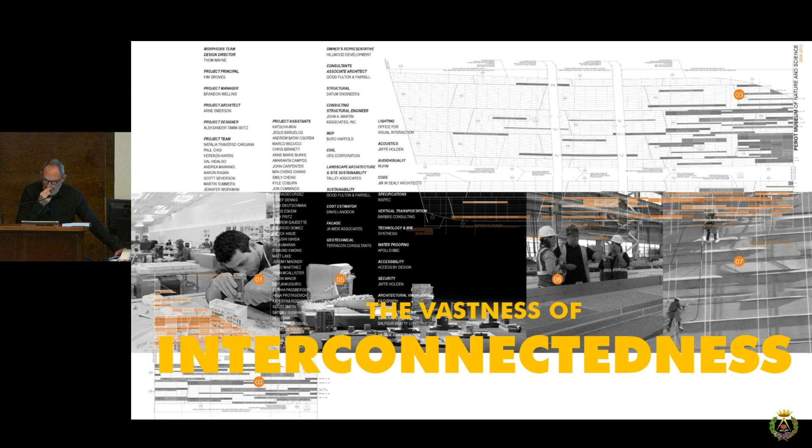You start your thinking out of school, and it's somewhat private, and you're looking for a voice and a signature, and it's somewhat mysterious, taking place somewhat intuitively, the way if you were a musician or a painter in any different art form, you're locating your own instinctual stuff that's separate from the more discursive stuff that comes out of your university training, etc. And if anything, you're challenging or reworking that, because the university is broader.

Yeah, that's better. I like when you go black. It's always weird to be talking to blackness.

You're locating yourself in formal terms, and there's definitely things that are going to show up later in your life that you're not aware of. In this case, notions of disconnectedness and fragmentation, which were much more part of my personal life, had to do with my own condition as a young man. You're exploring something, and you're not even quite clear on the nature of that exploration. It's quite intuitive. But what you are clear of is that you were influenced by certain people.

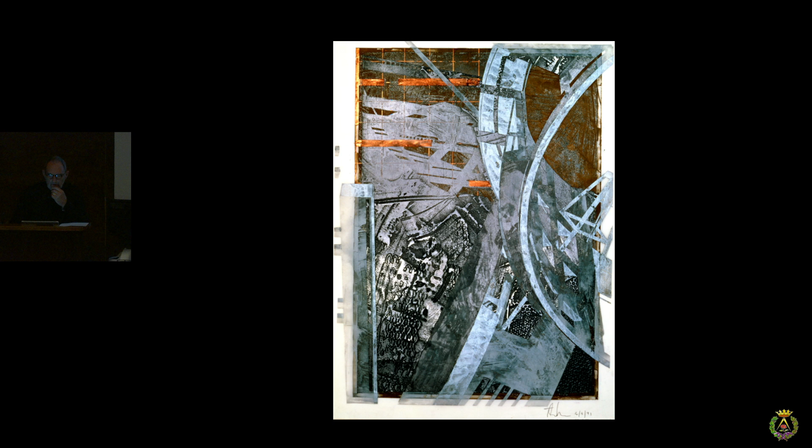Then there's other kind of simpler things. I'm in my late 20s, and there's no work. I'm teaching, and doing a little bit of stuff to make a living, and this is my output - this is the work I'm doing. In the 70s and early 80s, there was actually a different environment in the US than there is now, and I was being shown in galleries, and I could actually use this. It was accepted that as an architect, you could work conceptually. And the output is that.

Again, I'm looking at multiple mediums, and the work is progressing, the idea is progressing, and it's going to continue working with formal ideas which have to do with new notions of coherency. I'm fascinated in the way architects, in the simplest way, we order things. We concretize the world. We take idea structures, notions that are social, cultural, political, etc., and we concretize them into form, right? And we use inert matter, basically mineral material. With that, I was interested in the vibrancy, the aliveness, the awakeness of that material.

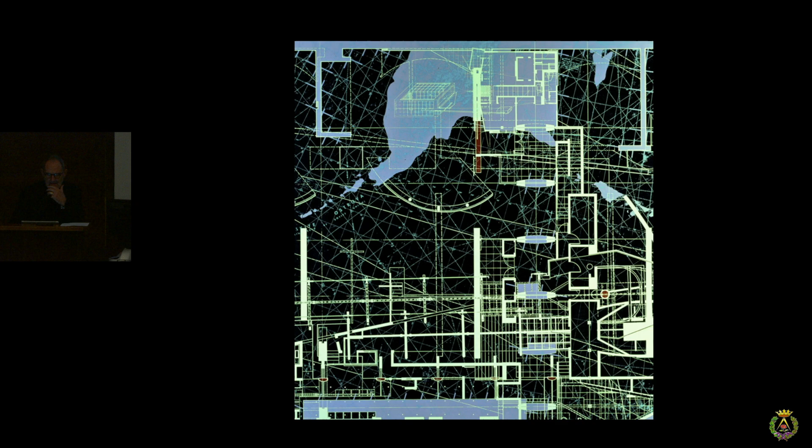And communicating that - I'm of a generation that broke from the modern tradition. In the 60s, late 60s, when I was in school, there was a complete openness to what education was, what architecture was, and I left with questions versus solutions, right? And then the influences were vast, and they weren't coherent, or they weren't connected.

So Rossi and Stirling and Archigram, and I could rattle on, the Tendenza - all of them were just seeping in, and there was no connectivity. It was up to you to figure out the nature of these kinds of issues. And they were very, very fundamental, the most essential notions of what architecture is, having to do with even its stasis, its permanence, et cetera.

And of course, with that came the obvious influences of that period of time, which started with political resistance and an explosion in the arts, because I was inundated in film - it was Truffaut and Godard, and it was that era of experimentation. And of course, in the world of music and culture taking place at that period of time, without any question, had influences, maybe even more so than the architectural.

And the drawings continued, and then it started in the late 80s - the computer shows up, and I'm drawing, but I'm trying to draw like I draw, and I'm kind of challenging the rules of the highly systematized notion of the digital, which will be later the conversation. It's going to quite radically change how we think about architecture, but it's going to take a decade to figure that out.

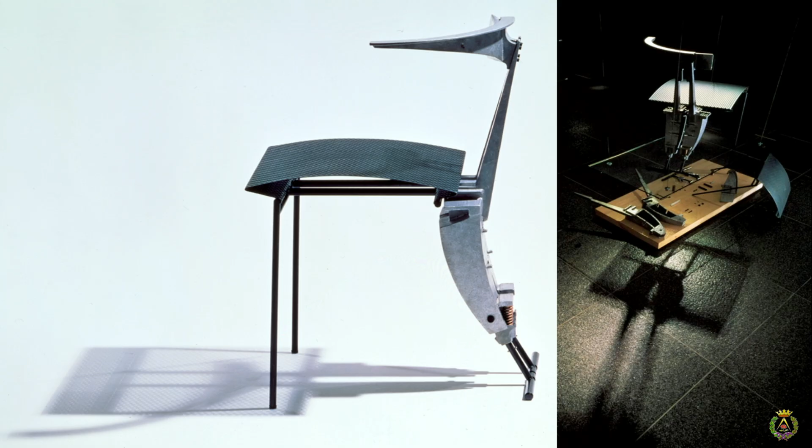But what I really was fascinated with was the mechanics, and that quickly became part of our early work, and then with the conceptual stuff that came out through the drawings and the models, we're making things. We're very much involved, and it started with very small scale things and objects. We're investing time in various material processes, and understanding that the capability of creativity comes out of that process very differently than the conceptual or intellectual process. It became clear at this time that there was a connection between these two things. They both kind of operated together.

Out of that came an interest in intensifications of the work, because then the first work shows up and it's normative, residential and little cafes, and had no interest whatsoever in program, had no interest in the relationship of those things.

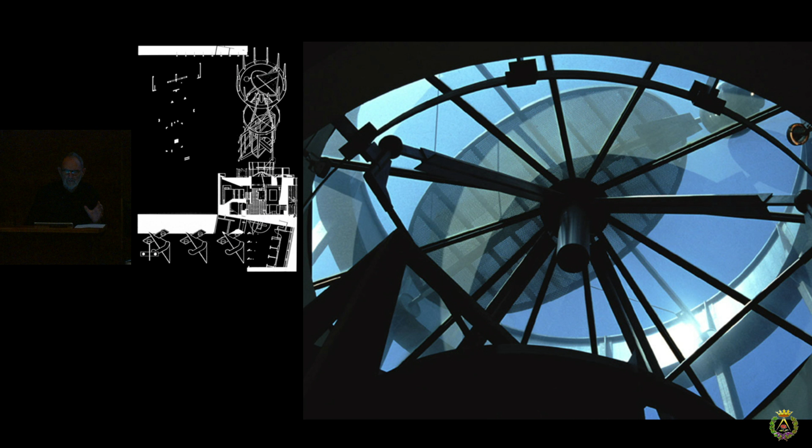We're interested in locating architecture. And how does one claim an autonomy for architecture? In this time, we were totally committed to architecture as an autonomous act, and we wore it as a badge outside of normative behavior. Couldn't do that today - that's not a model that you guys can use. It could happen in the 70s and 80s.

But this led to kind of intensifications of projects. We're working on a cancer center, and this one piece became part of a children's play area. It became a fascination where we could use the interests we had at the time and manifest those in the project. This became kind of continuous.

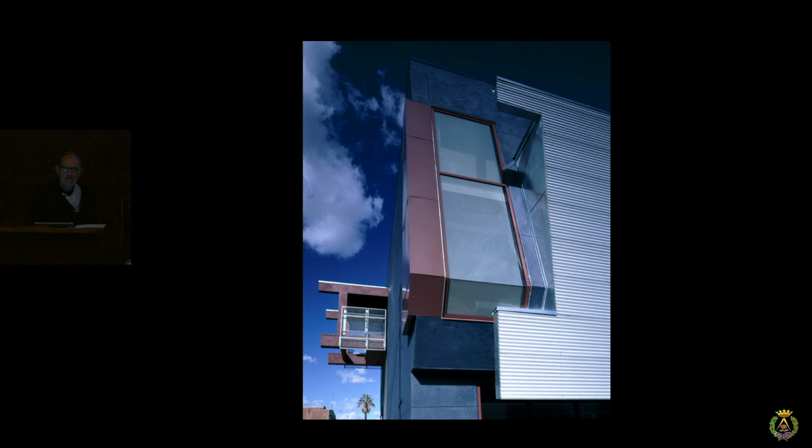And it's going to start leading us into something else, and at this time, without knowing it, we're starting to shift a notion of part-whole in the most basic way, Palladio. The relationship between part, fragment, connection, disconnection, the way one organizes an idea having to do with certain hierarchies, repetition, etc., were being challenged, but the focus was still more on the degree of intensification within the work.

And then this little house became kind of a beginning model that was going to move us more into an urbanistic direction. We're making things, and it's starting to become clear that we can organize these different systems.

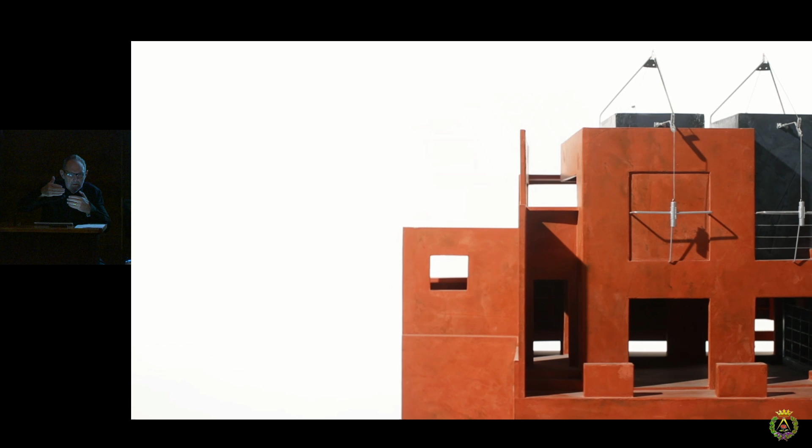And I became more and more fascinated by an idea that Smithson was an initiator of in the mid-40s, having to do with multiple systems and the autonomy of multiple systems making up something. So the thing you're making isn't made out of a single system, it's made out of multiple systems, and it's getting clearer as we're producing these first little residential projects.

And it's starting to lead us into another idea organizationally, that there isn't a single dominant system. There's a series of interconnected things taking place, and it's more and more about interconnection.

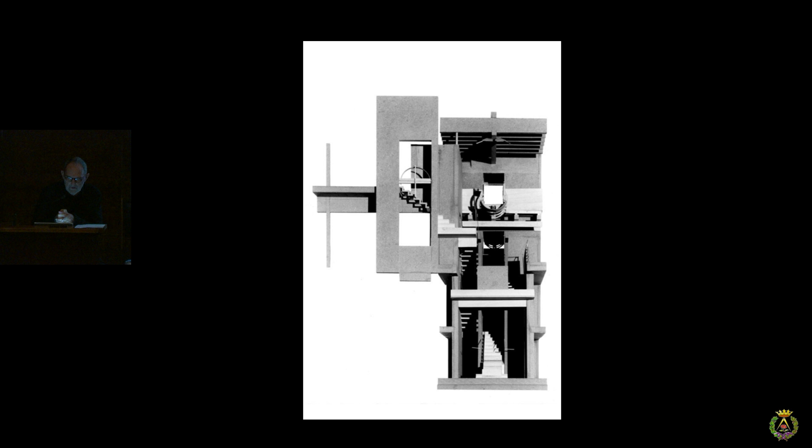And then with that, certain things happen that are absolutely accidental and circumstantial. A fragment of the model of the project in front of us - we're building one of these areas we're focusing on, and then as we look at the photograph, we realize that the fragment is more interesting than the total. We're just looking at something going, how is it possible to build something that's completely unfinished, that it now alludes only to the future, the thing in front of it.

It's actually quite a hard thing to construct, at least it is for me mentally, but it requires operational strategies that you understand is the method of working that achieves that. And at this time now...

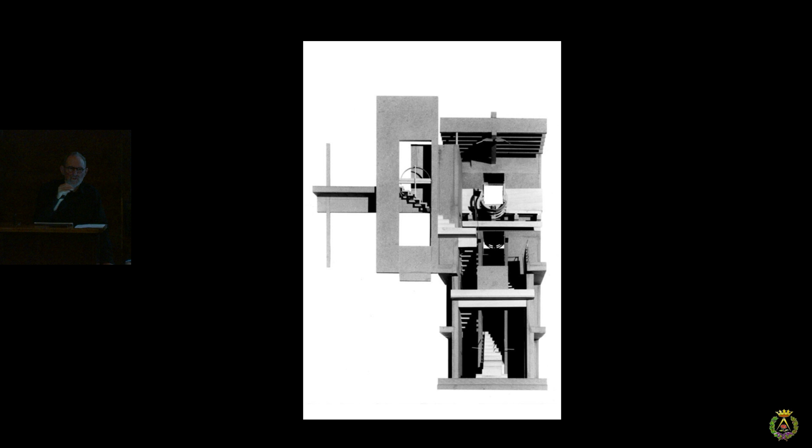the people that I'm connected to or influenced by would be Bernard Tschumi and Peter Eisenman, and people that are using operational methodologies. I'm getting more and more interested, especially in my academic work, in challenging a priori design thinking, drawing, which uses the past, uses precedent, and using operational strategies that take you someplace that you have no notion of where it's going. It's challenging anything a priori.

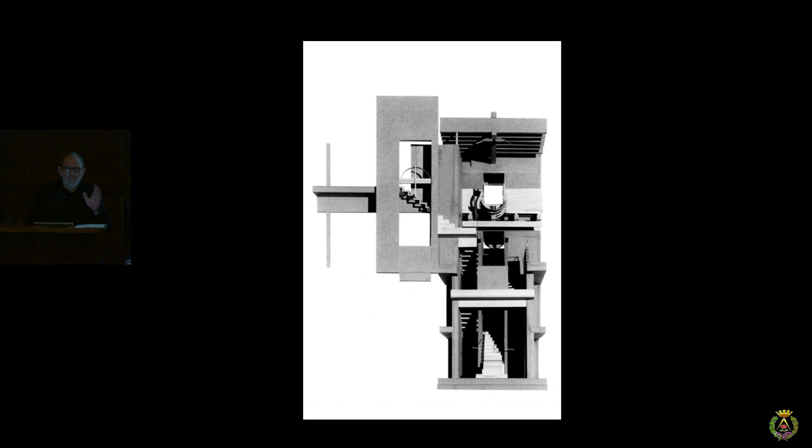And it became kind of a fixation in that the only things I was interested in were the things that I didn't know where they were going. And it became, at that point, an absolute kind of continuum.

And then immediately after that, the development of the 6th Street House, where we're now organizing something through an association of a series of elements - in this case, 10 pieces of discarded technology, of dead tech. And at the same time, breaking this notion of singularity where every elevation is now a response to its urban condition. It's an experiment with rethinking the nature of, again, coherency.

And then in the resolve of this residence in Santa Barbara, a development of now a language that's made up of these various systems, all left unfinished, all fragments of some total thing. And you're looking at something that more and more is made up of relationships. At this point, it's getting clearer and clearer that we're not any longer interested in the object, we're interested in the relationship of objects. And the focus is getting clearer and clearer.

And then with that, we're now starting to get more and more involved with the relationship of site and earth, and we're digging. And again, I'm absorbing an incredible show at Leo Castelli, can't remember when, and I became aware of Pichler. And then right after that, I met Raimund Abraham, and I got interested in digging, and the whole notion of ground became kind of a fixation, and it became an expanded kind of interest.

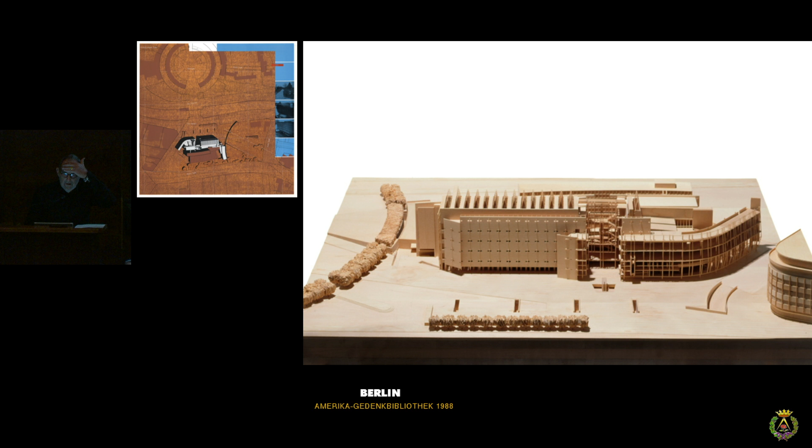And then we're working on competitions, and we got invited for the Amerika-Gedenkbibliothek in Berlin, and this notion of highly specific architecture that's coming from multiple systems that makes up a combinatory language—although I didn't use those terms at that time—is becoming absolutely part of an urban strategy, and probably is much more relevant urbanistically than it is architecturally, you might argue.

And so we have something here where we can identify historic elements and use those as grounding elements, and we can invent certain things, and it's going to be a combination of conserving and expanding found urban elements and provoking those. And then with that, I guess, a clarity of not taking any singular position of being conservative or provoking—that those things happen simultaneously.

We didn't discuss that in the urban work, but it absolutely could have been a conversation today—that as you look at the site, aspects of that are in fact reinforcing or dealing directly with found information, and other things are absolutely provoking that. And they can operate on a scale. If we looked at various projects, some of them could have much more been in the provocation area, and other ones could have been much more in the conservation kind of territory.

And again, the competitions are now practice runs for future work. I'm in my late 30s, and we're doing smaller scale work. And this—we won a competition for a theater that didn't get built.

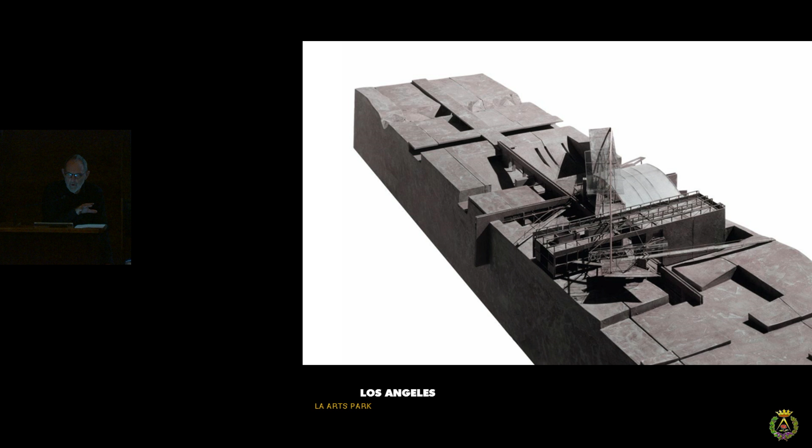And now any number of things are taking place between organizational ideas and the ground, and the site is becoming more and more prominent as the relationship, the site, takes place.

Infrastructure, theater complexes, commercial complexes, we go on. And it would have been really interesting, again, if we had continued the conversation with you guys today in the urban—it would definitely have been the next stage of the conversation maybe. We would have discussed looking at really, really different kinds of potentialities of the integration between landscape and site and building.

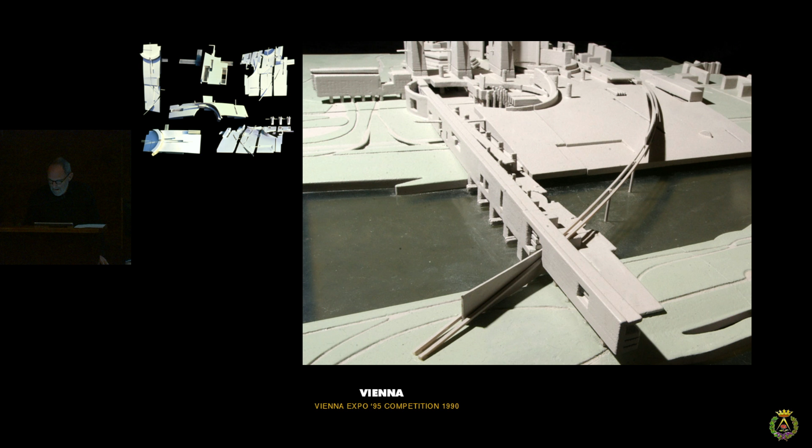Because as I said today, one of the opportunities in front of us is something that's much more hybridized. Because in this project, half of the program would be ground related and half within a more traditional typological approach. And we're now discussing typology and morphology—there's a kind of conversation taking place.

And then in our project in Chiba, this is starting to take place as we're trying to find an architecture which is very much about site and starts with the notion of site and landscape. And this could be a dialogue between landscape and building.

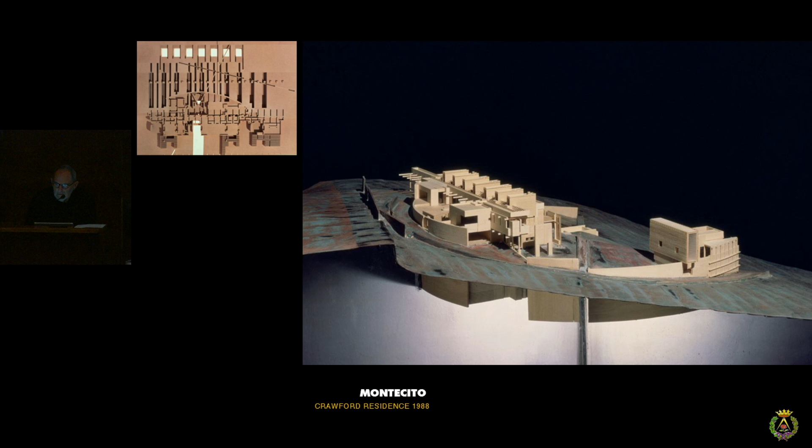And then right after that—what have I got here? Ooh, we shouldn't have shown up. We're doing a house, and a lot of these same ideas are taking place.

We're starting work now, and again I've put this together for you. I'm working a couple of decades and a half in, and we're getting our first substantial work. I'm 47 or 48 years old, and it's a school, and we had kind of an unusual client that allowed us to explore.

The work now is clearly shifting from an interest in autonomy being challenged, and the fixation on conceptual, formal work is now getting challenged to some degree. We're involved in architecture as a social act, participating in the educational act, and we want to expand a student's curiosity about the various potentials of how architecture can service them.

And then with that is the beginning of the digital world. The little piece at the top is the first conceptual sketch, and it's again going to be an augmented landscape. Out of that is going to come this.

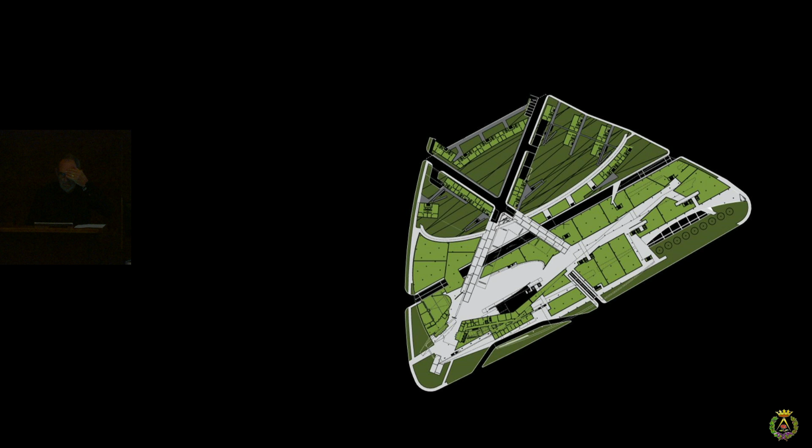Right after that, we won a competition in Austria for the Hypo Bank. We're in this middle territory now between the older processes of drawing in a manual sense and the digital world. It's becoming clear with these drawings that drawing is now highly limited, and that the thinking process takes place with complex relational material that the digital world allows us to do.

And it operates three-dimensionally. At this point we're probably realizing that the planimetric is pretty much over as a primary process of developing architecture, that we're now moving into something three-dimensional.

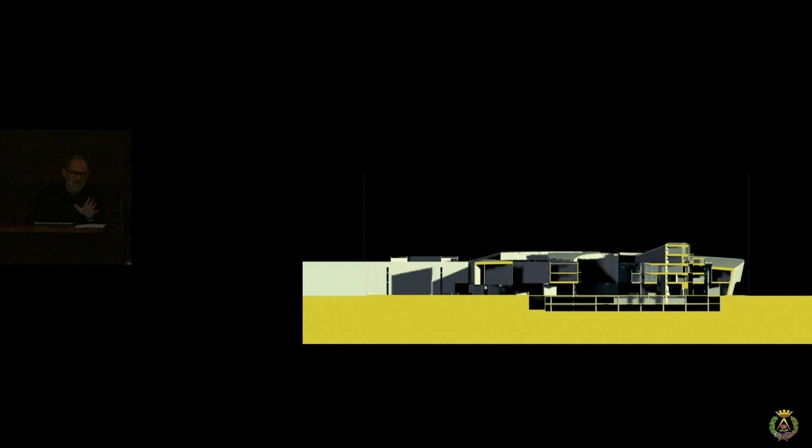As we're looking at sections, huge numbers of drawings that are now mechanical, but what's taking place is there are less and less sections in the conventional sense. They're CAT scans, a way of observing a project and understanding it organizationally within certain terms. And out of it came this.

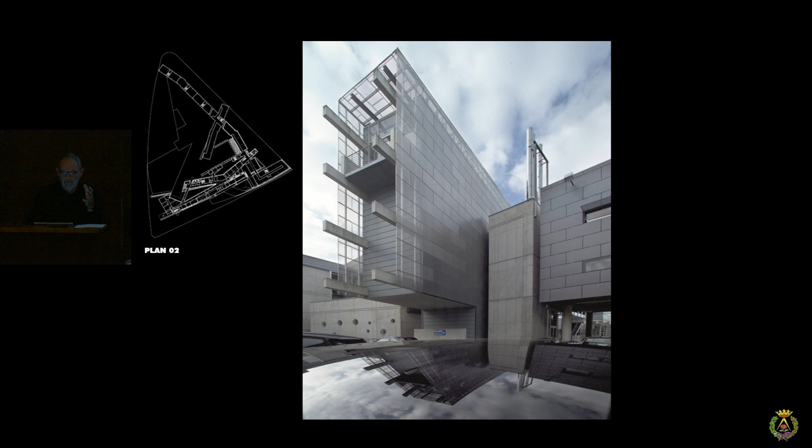Then right after that, for the same client in Udine, a project dealing with landscape, building, and infrastructure has a more singular idea.

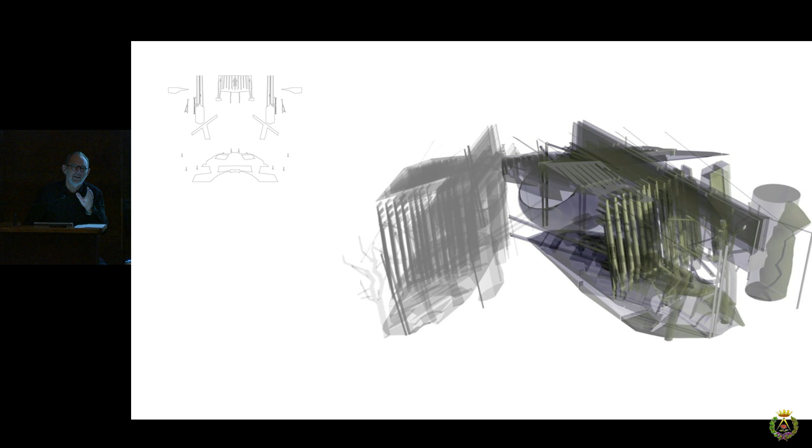Then the digital is having a huge effect on us in that we're producing things three-dimensionally that have different notions of association and arguments, and they're dynamic. The section you're looking at, again, is a CAT scan — I'm cutting 100 sections through this and observing the nature of the product we're developing.

Then what happened, which was enormous, is that you could crawl into your drawing, or whatever you want to call this virtual space, and you could connect concept and perception. That became enormous — we can actually experience the conceptual ideas, the broader intellectual thinking, spatially.

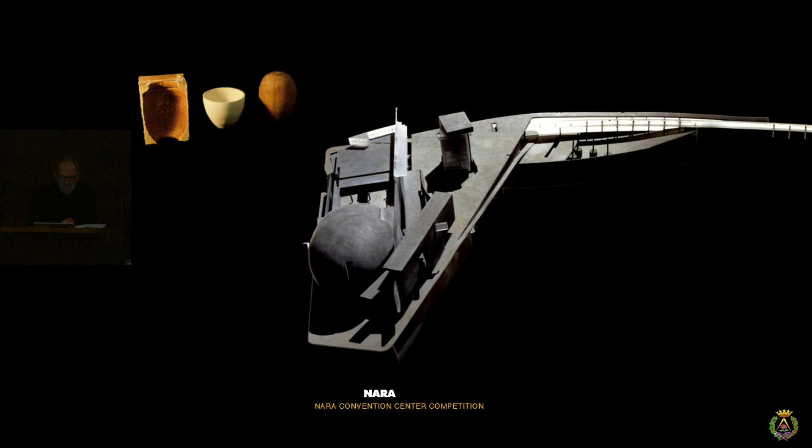Then there's a competition for Nara that we lost to Isozaki, where we're producing forms we can't even produce mechanically. Four years later, we're working on a competition where we can now, in minutes, operate within complex geometries. And what's taking place now, which all of you entered into, is interesting today.

It seems like there's a very different kind of direction here architecturally than there is in the US. The work I saw was still Cartesian and orthogonal, et cetera.

For me, this just opened up possibilities. I have no particular — it's not about a value judgment. It's just there. I don't have to agree or disagree with it. It's just now how I can work.

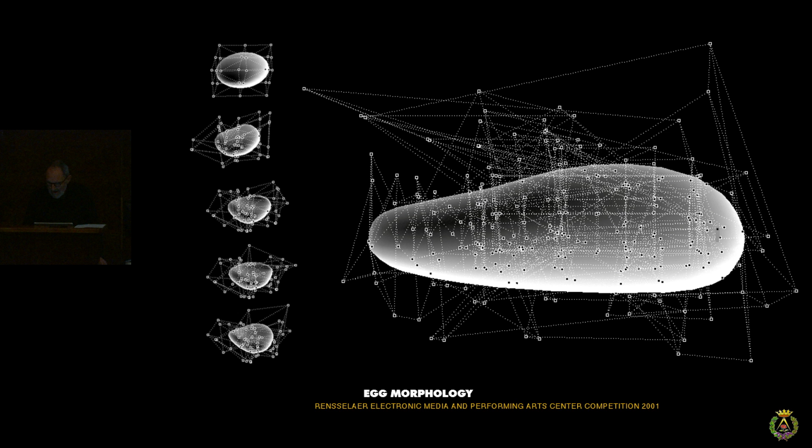I can now operate and move very quickly. I can look at it sectionally in a traditional way, I can look at it as a model, put it on a site, and model it — all taking place through the digital world between 8 at night and 8 in the morning.

I'm also moving at the speed of light. What you're going to face is larger and larger scale projects with less and less time. One of the things that will be absolutely essential to architects today is dealing with the speed at which the world operates in a commercial sense, because you're dealing with larger scale projects with the least resources.

The first stuff I showed you, I spent a year on a residence — and now we're spending that same amount of time on projects that are in the million square feet range. There's no choice.

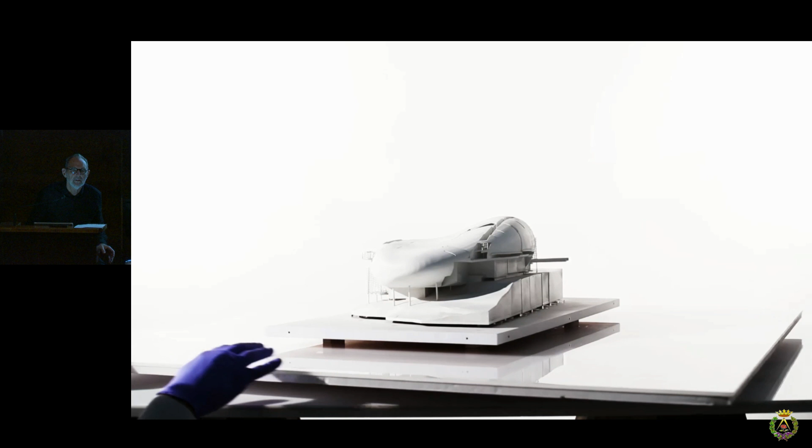It's the nature of the marketplace, right? And there's a huge shift going on now. We can look at our work in incredibly comprehensive terms, what's taking place in the digital world is affecting your work right now—that early schematic, pre-schematic work is loaded with information.

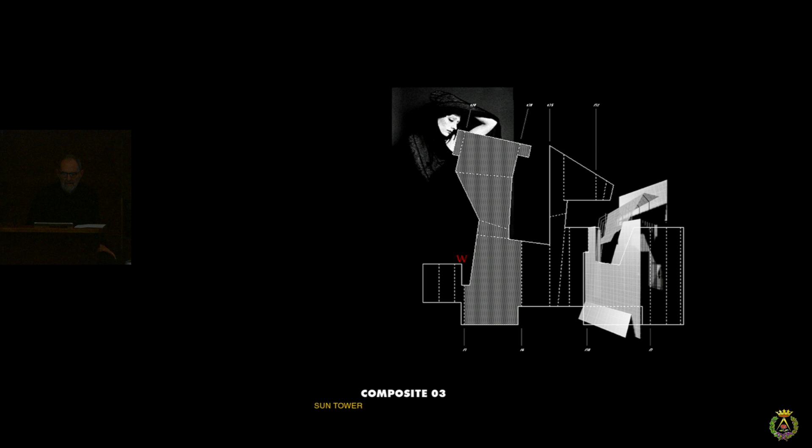You can discuss it in tectonic terms, structurally, mechanically, functionally. As projects get more complex, you're looking at a model for a competition that REM won in Taiwan—that's 8 weeks, and it's the necessity of how we work today. Then we're in Korea dealing with skins, which becomes another preoccupation. We're using Jim Dine and a piece of clothing, one of the last projects I'll show you. We're capable now of looking at things very quickly, organizing them in very complex terms.

The work begins now, you might say—that's the preliminary work, establishing a lot of the terms I'm interested in. We're going to start in Los Angeles with our first large-scale project, which has very much to do with the public, and the iconography of Los Angeles as the city of film. It continues our interest in the eccentric—I'm searching for elements of design that come out of chance and circumstance, idiosyncratic versus systematic.

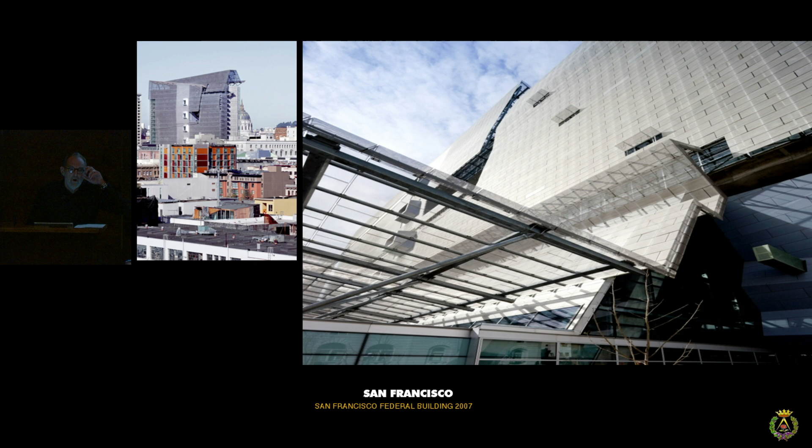Then in San Francisco, we're taking the performative aspects—the skin you just saw is moving, producing a highly efficient building. What's happening now is we're moving further away from a preoccupation with the formal and getting more involved in performance and the demands of buildings as they increase in scale. This is the headquarters for the federal government, the first tall building with no air conditioning in the United States—it's performance driven.

Again, it's based on a main public space, and we were very connected to the formation of the program. It's getting clear that the work becomes more strategic—when one takes responsibility and pushes the program in the direction of the project prior to formalizing or concretizing it within form. In this case, it has to do with a substantial shift in the workforce, now based on transparency, interconnection and dialogue, challenged by the digital world again, where any place equals workspace.

There's a complete challenge of the singularity of work versus leisure versus recreation. The architecture, this notion of the combinatory, these multiple systems, isn't even part of the conversation—it's the private conversation within the studio, nothing to do with the client. The focus is on multiple levels of performance. One major idea was the icon of the entry space and its importance in representing the U.S. government. Then the performance became hugely important to the building in terms of environment.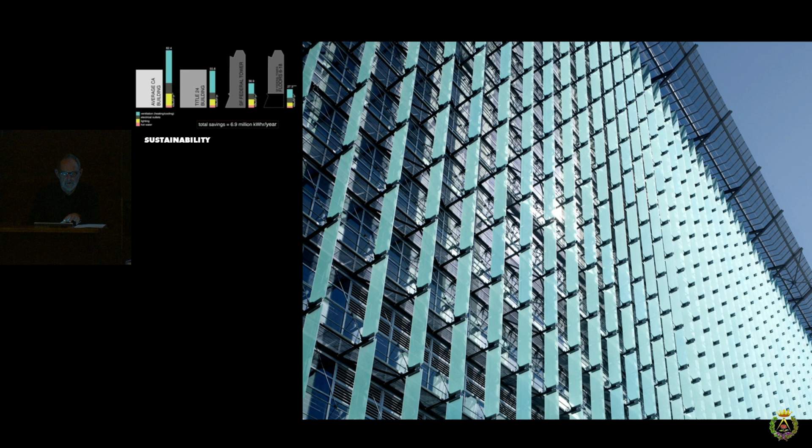The north face is guiding in sun, and we can now talk about this in terms of its relationship to total energy. We can discuss with our client that one of these buildings totally powers 600 houses. I would have said in today's jury—which we didn't get to—one of the conversations would have been looking at your work in terms of its broader consequences, being responsible for those consequences as their magnitude increases and as they have more importance to city making.

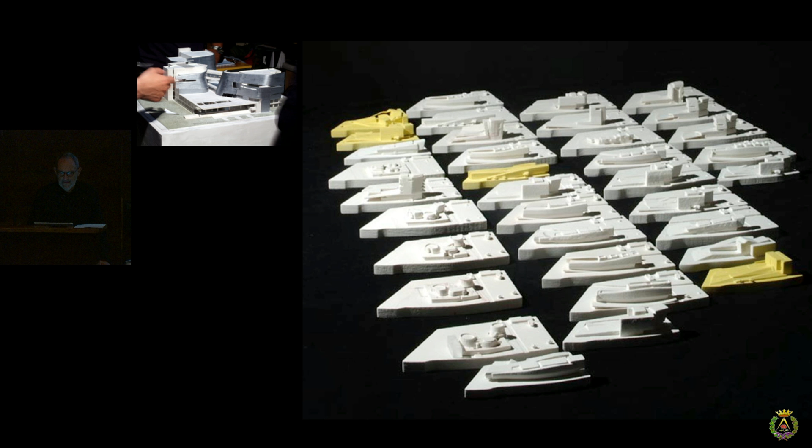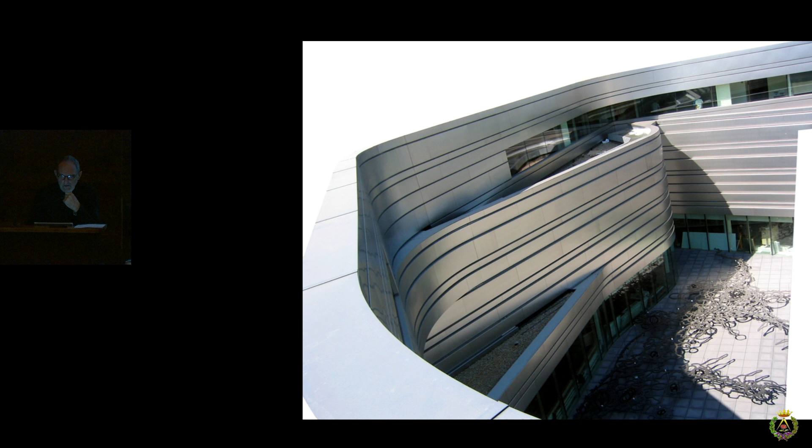And then in Eugene, we have this completely different notion. We're building a courthouse, and it's about a symbol. We worked through literally dozens of schemes with the Chief Justice to come to grips with an acceptable notion of the history of the courthouse. It's going to start with the surface and the expression of this building, which was going to be part of the documentation of the Constitution, the Bill of Rights. It's going to be fluid, open-ended, clearly representing an idea that'd be very didactic of the openness of the Constitution, of the nature of our system of law. And it's going to lead you into a courthouse.

And the courthouse is going to be filled with the history of 250 years of the traditional courthouse, the one-room courthouse. Literally, the bench that you sit on and the nature of that would be part of that. Once you're in the courthouse, it decodes the notion of the building. You understand that the form you're looking at is a collective tissue of the courtroom itself. In the States, the single courtroom, the single courthouse was kind of the history. And then there's times when you get a very odd client.

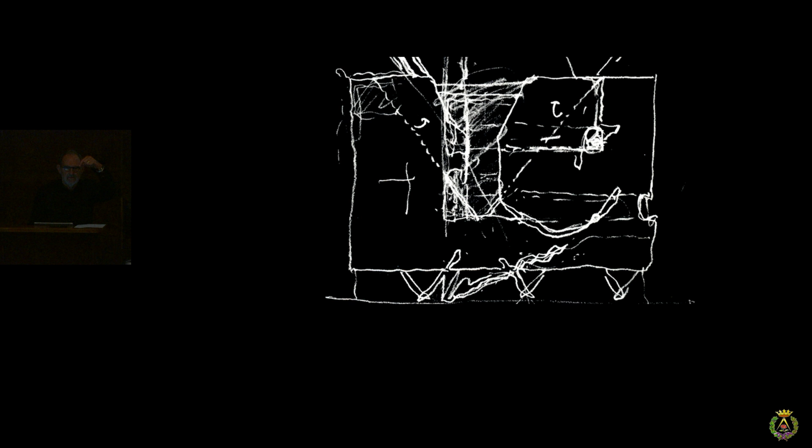Cooper Union, which is completely in line with the formal, and they were interested in the idiosyncratic. They were interested in something that was asystematic and something that conveyed the intellectual creative capital of the institution. That one is about the connectivity of engineering, art, and architecture, which is their claim.

So the beginning notion was locating the project. Again, continuing our conversation today, your first kind of work at a project is actually locating the aspect of the work that's the most important, that you have a constituency for, that you're in alignment with. And it started with the central space.

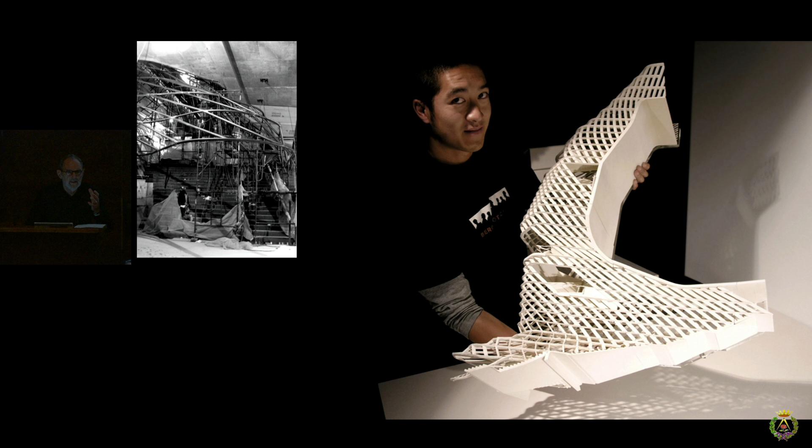It's going to be a vertical 11-story piazza, and it's about connectivity, and it's about the advancement of discourse and conversation, which is the essence of the school. It's going to be the thing that's memorable about this particular institution as you're looking up in that space and you're crossing, as you move through the space. All of it is going to be using movement and traditional architectural elements as part of a social connective tissue.

Today, what's going on in education, which is really fascinating, somehow seems to be all located at Stanford D School, is the social pedagogy. We understand education much more within broad social terms. There's a huge shift - I can't speak for this place or for Spain - but a reshifting of hierarchies and relationship between professor-student and the notion of how one even studies, which is affecting education. And then again, it's filled with unique kinds of spaces. And then once in a while, you get kind of odd opportunities.

In our Museum of Nature and Science in Dallas, we've been engaged in developing the site. And now we have this incredible opportunity where reconstructing the site becomes the major part of the project, and services the project in terms of its exhibit spaces, in terms of its site next to a freeway. The beginning of the project starts with constructing site.

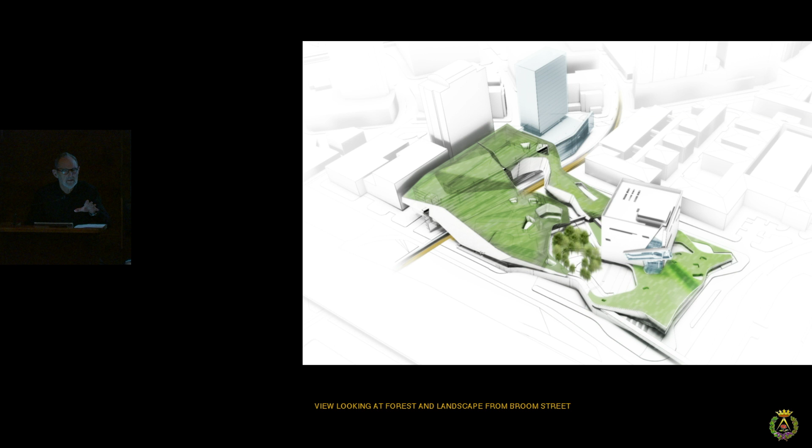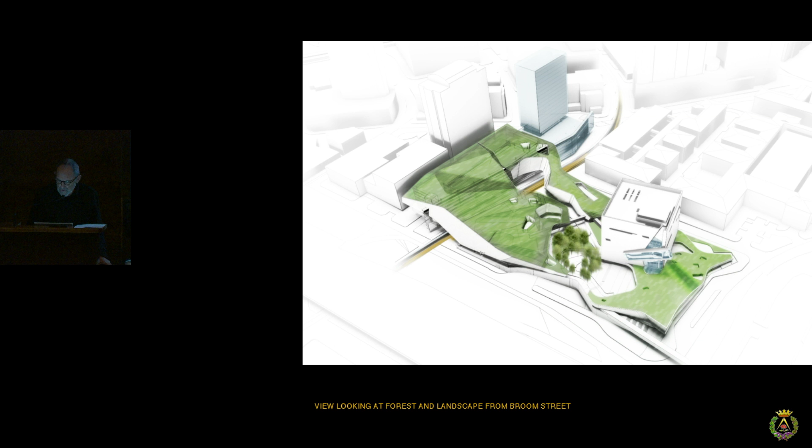Again, today, for those we talked to - we didn't have that conversation, but we could have discussed it, it'd be the next phase - you start with not building, you're reconstructing site. You understand that it's not building, you don't accept the notion of building on land. You start with the notion that you have the responsibility that starts with the reshaping of the site itself, and it becomes maybe one of the prominent ideas.

So the first phase is this, and we have certain elements that are going to end up on the site and other elements in the building. Then the second phase is going to continue this. And this is also interesting - the client wouldn't buy this, too advanced for them. They wanted a more traditional building. So the first one, the cube, ends up as part of that.

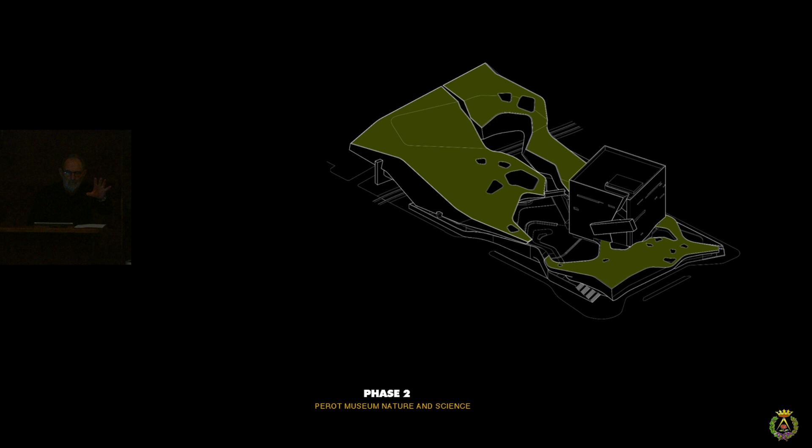And now they've decided that they get it, they understand it, and we're expanding it. The more dominant piece will be the much more aggressive site piece, which also explores a much more progressive idea of the form of the building.

So here we are looking at the first diagrams of the site itself, and it's going to replicate the site of a very new city, and we're using found materials that were on that site prior to urbanization. Now it's going to go through various iterations, going back and forth between quick diagramming and much more precise notions that come out of the digital. Again, it's going to develop three-dimensionally from the very beginning, because we're looking at this now within months. And it's integrated, in technical terms.

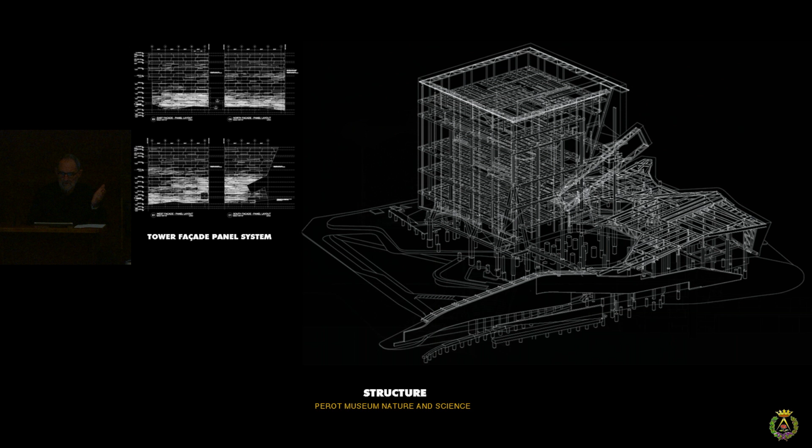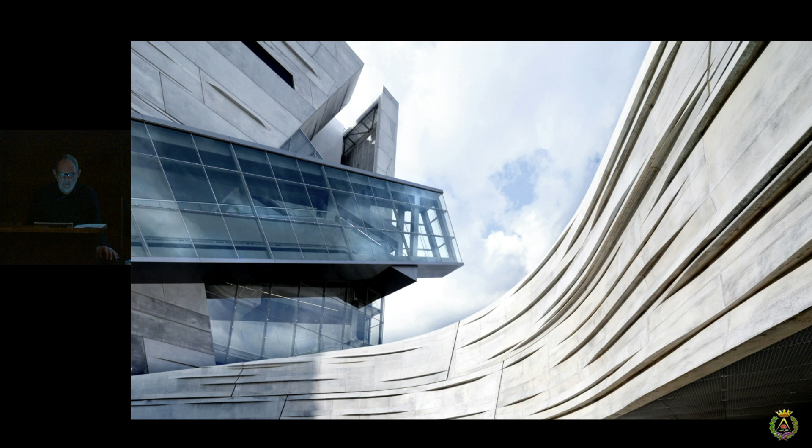And then the whole thing is going to be a dialogue between site, information, and building. In a way, we built the largest exhibit, being a nature museum—kind of the conventional entry point, the vertical movement which leaves the building, which I'll talk about in a minute, and the vertical space connecting what are essentially black boxes for the museum.

The entry sequence: we're on a site very separate from the city, and we're committed to making this an urban event. As you move up the escalator, it's leaving the building, moving towards the city purposely. And when you arrive at the top, you're engaged in the city again—you've made the connection, mentally, to the city.

And then, again, I think what's changing is that a lot of you are very possibly going to get engaged in very particular technical aspects of work. Because of the increase of information, we very early on take responsibility for things.

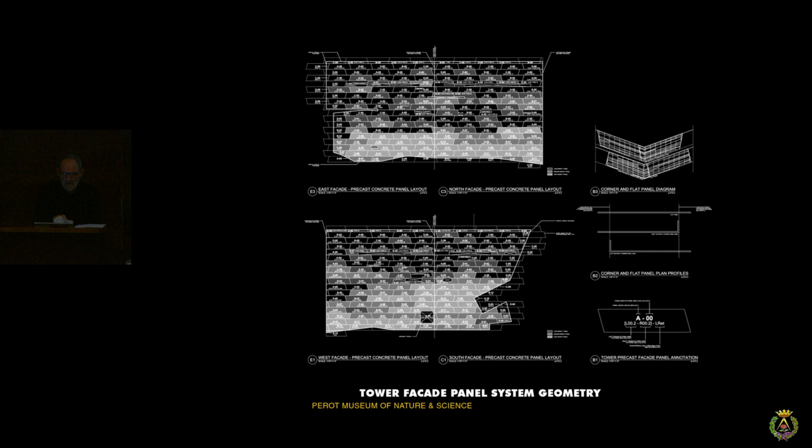So we're making a facade, and we had a very, very tight budget. We're in a city that makes concrete, so from the beginning we knew we had kind of opportunities. We're inventing a facade, and we're at the site prototyping it—the woman in blue is from the studio—and we're engaged in very particular terms: the method of production of the panel and its construction. Because of that, we're producing something under very taut economic terms, and we're also experimenting and pushing the technology with the subcontractor.

Out of that, this is an ad in Architectural Record—six months before the building opened, they're selling our product. It's our product. And it opened up yet another kind of division in the office. We now have a group, basically it's X-Tech, and we're constructing products that represent a contemporary kind of approach to the problem.

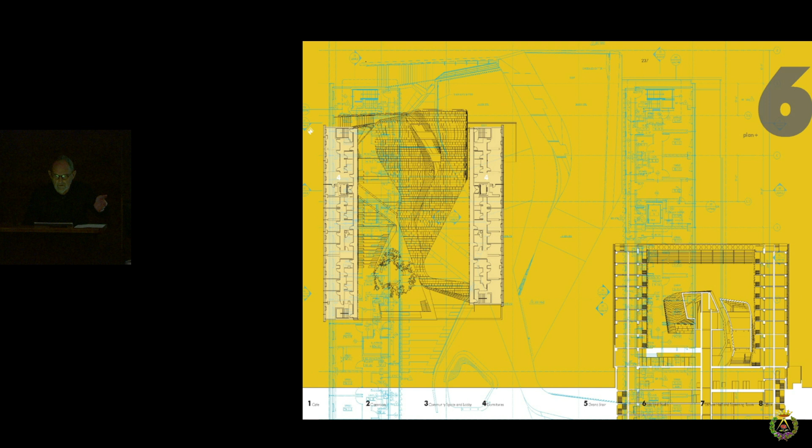And then again in Los Angeles, with the Emerson College from Boston, working reiteratively—make something, critique it, remake it, et cetera—and out of that comes the plan, section, elevation, et cetera. A school that's in Boston coming to LA, so we're producing something very much about a Los Angeles kind of dynamicism. It's housing on the edges, academic and administration in the middle.

And highly urbanistic—perfect site, Sunset Boulevard, the Hollywood sign, couldn't have been a more ideal site. All of it exploring something highly urban, and again very much about public discourse. We're bringing aspects of Boston, which would be the antithetical city to Los Angeles, and it's about spaces between—found spaces, interstitial spaces, compressed spaces.

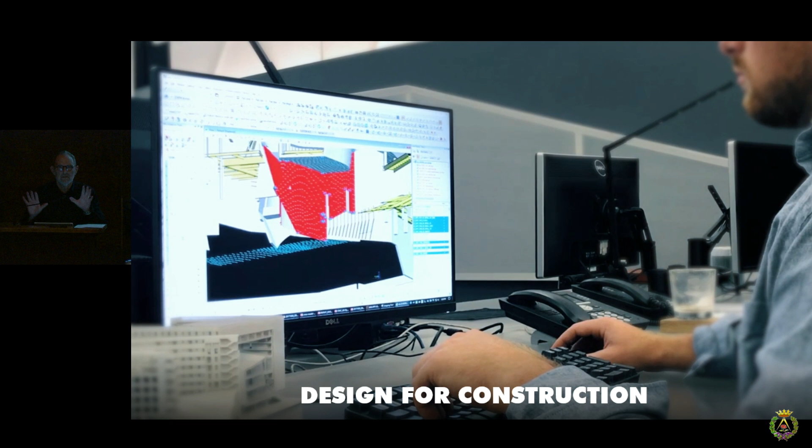And again, as the language changes—and maybe someone will tell me before I leave, because the work I saw seemed to be more or less Cartesian—as you push the opportunity for language, which includes something as simple as a double curve, you find more and more you have to take responsibility for the making of that. It goes back to the first slide I showed you: if we design something, we're responsible for making it.

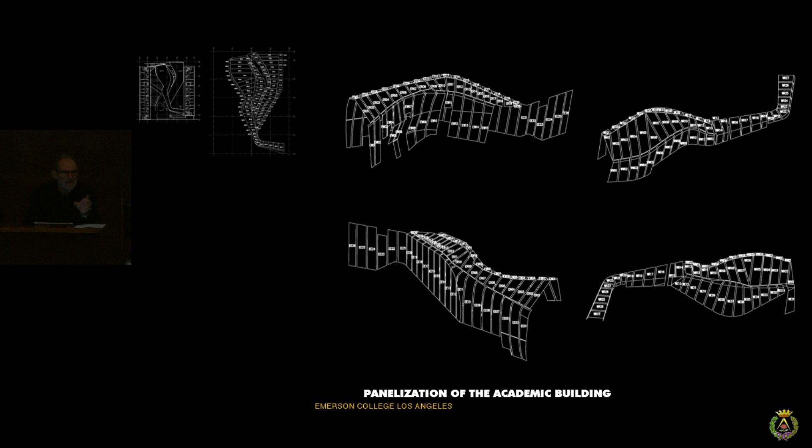So again, we're looking at it in model, systematizing it, making complex things where the shapes are highly differentiated, and we're in the shop again with our people inventing the method of making this thing within contemporary terms of budget. It's moving architecture more the way we make a Boeing airplane versus a building, and it's going to continue in our work to allow us to make this.

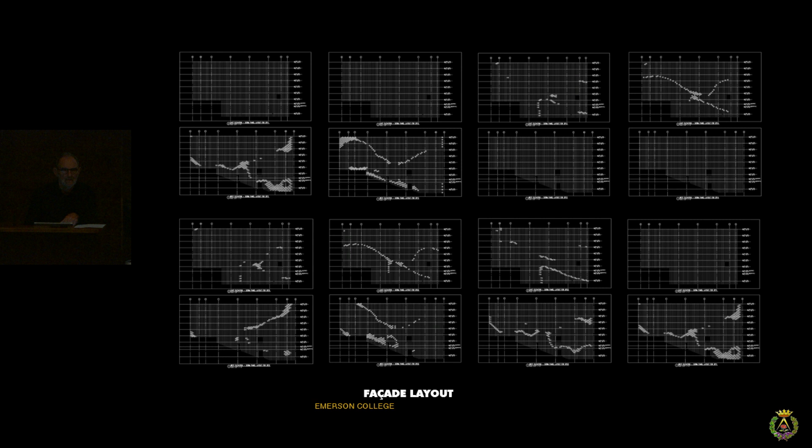And then we look at a skin, and again it's going to pursue something highly differentiated versus singular. We're going to take responsibility, literally making and framing every part—it's coming out of our studio, and we're giving them a roadmap of construction. So we've given them the elements here, and literally take responsibility for the production sequence that gets us this.

Okay, and then I got 2 more projects. This is going to summarize, in a way, a lot of the work I showed you.

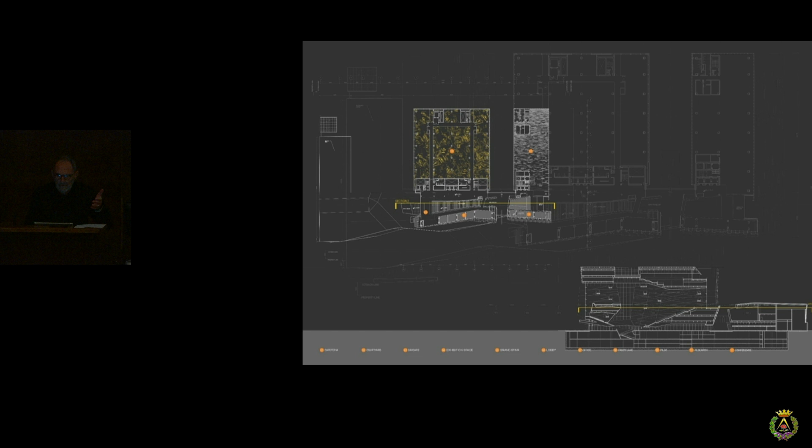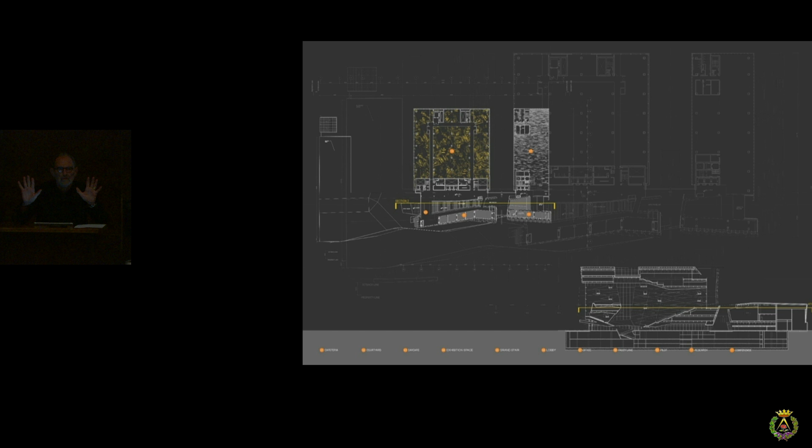It's a research center in Seoul, Korea, and it's going to be very much about a dynamic sectional quality that you're looking at the bottom of the screen. It's going to summarize a notion towards skin and performance. In the plan, the upper part is all research. 90% of the building is the research center, and the very front part is meeting spaces and social spaces. It's a very straightforward kind of diagram that starts the building.

And it's facing a park, and it has this incredible site, and the entry space, seen from above. Again, it's going to represent the differentiation of the city. It's not a single building. As you enter the building, you enter this connected space.

And you enter something that's very much a representation of the nature of the larger organization and what they represent, and it's the scale of Notre Dame.

Again, looking for specificity of the work, this is a group that produces very high technology fabric. The airbag on your car probably comes from them. We're using their material and reinventing it in terms of an internal skin, and these are 6 of their different fabrics. We're literally locating the nature of the product of this group - it's basically chemistry in terms of the major space, and retranslating it in architectural terms.

All of this comes from a very different notion towards commerce today, which has to do with transparency and interconnectedness and dialogue between staff. As you move across this space, it's where all the social activities are, and it's where all the meeting spaces are.

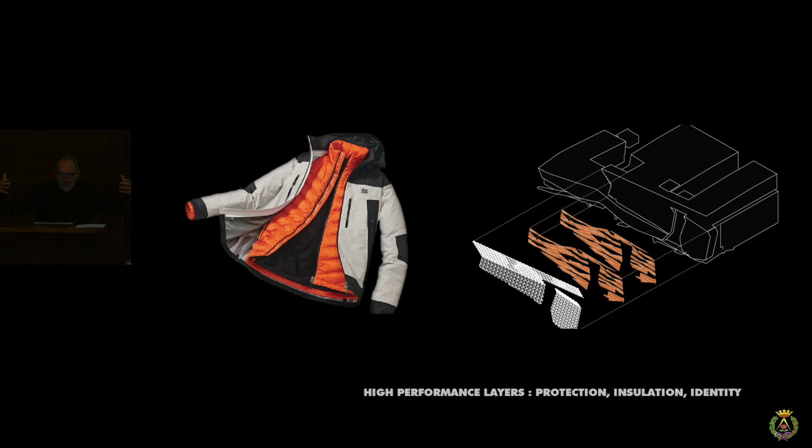The second part of the project, the skin, is a continuation of our work, but it's pushing it in terms of materialization. This company produces high-tech fabrics - they make fashion, and they have a construction business. So we're literally going back to the Korean building, and we understand that the skin is a second kind of outerwear. We're using their notion of fabric and translating it into an idea of our own new skin that's going to be a performance skin environmentally.

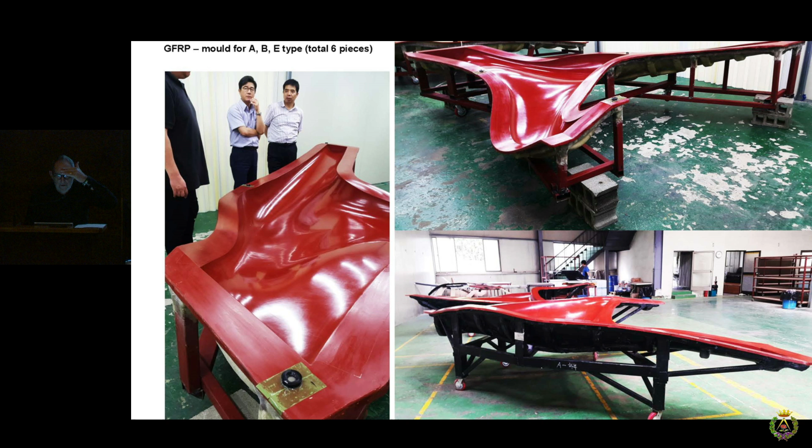It takes out 50% of the light, and we're going through those studies, and it's going to get us this. We're prototyping it in our own studio, and then when it arrives in Korea, the second prototypes are being made full scale. Then they're making a full-scale prototype on the building that gets us this.

From the inside, you understand the scale. We're now radically increasing it, and it's GFRP - state-of-the-art, carbon fiber-like, et cetera. That's becoming part of the activity of the studio.

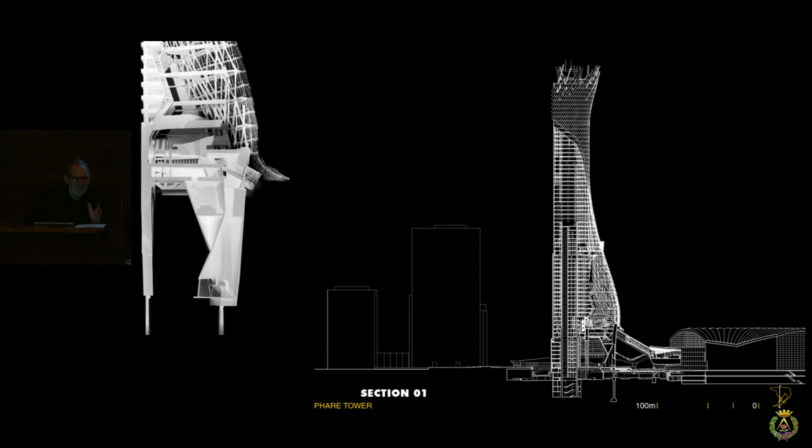Finally, our Paris project, which is going to use idiosyncratic ideas. The work comes with as little a priori notion as possible, and it deals with found information, really servicing us. We won the competition because we were one of the only firms that understood the difficulty and the specificity of the site, and that was really a non-site that gave us this.

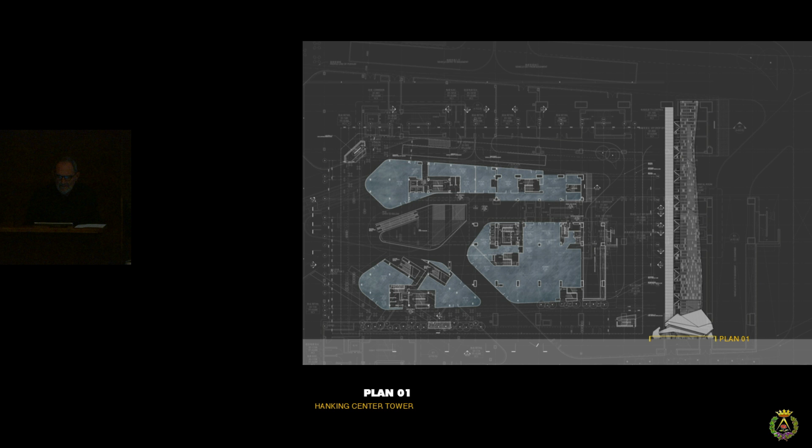Again, it's not a single building, it's an accumulation - a series of buildings that make up an urban construct. As you see it, it's no longer extruded, right? It's something that demonstrates itself in very different form based on how you see it in the city. Finally, that's going to lead to a tower that we're building right now, and it's going to be highly differentiated - every floor is different as you move up.

You're going to move across - we took the core and separated it from the building, so you're walking across 17 meters on a bridge, which you're going to see in a minute. The 2 entries, commercial, and there it is under construction. As you walk across the core, you're connected to the city on the 70th floor. You're looking at the city as you're moving from movement into the space, and then the space has no core - you get these huge empty floor plates that give you 360-degree views.

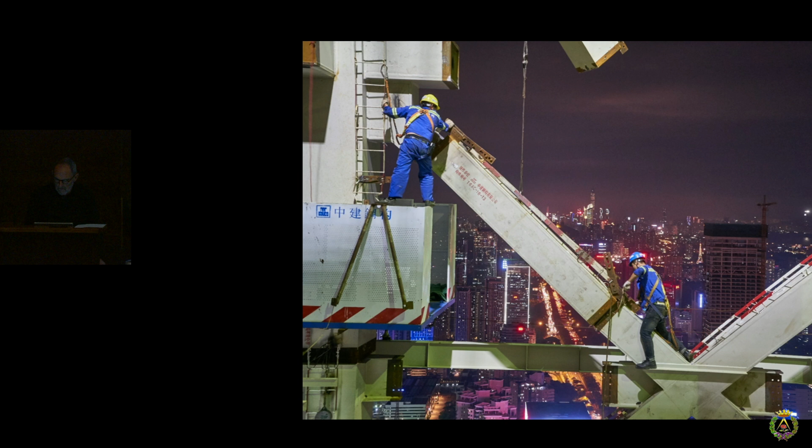There you go. How are we on time? We okay?

It's funny, I'm on a kind of a crazy trip. I'm worrying. I'm getting tired.

But in Milan, it's going to move urban, and it's going to be a campus. We won the project because we didn't build singular buildings - we understood it in terms of a campus, and we built public space and the buildings. With that, we use this idea of land.

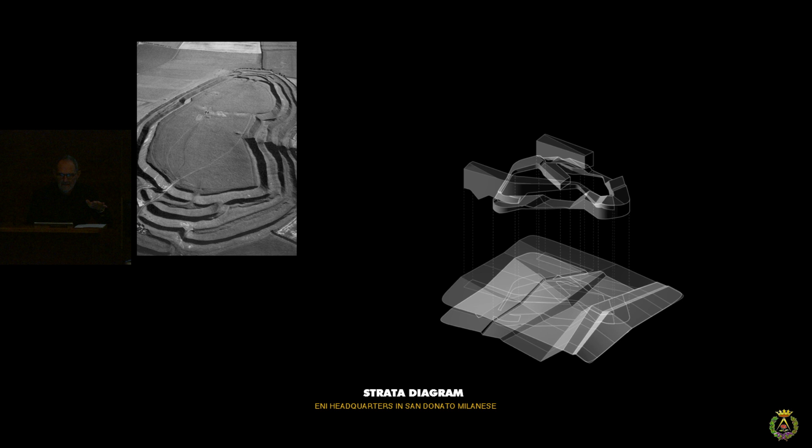This is for Eni, the largest oil conglomerate in Italy. We understood that oil is biological in stratas of geology, and we used that idea to establish the building. The building itself is seen in geological terms, and that was the beginning idea. We started from cuts of the earth, and out of that came a diagram and the stratification that led to a facade.

The campus itself, under construction, 3 years from now.

Okay, last project. But a break - I'm going back to drawings. I wish the woman we talked to yesterday was here, because this is what I would have shown her. We had an interesting interview.

I was interviewed for something, and we were trying to connect what you're doing conceptually, which operates under more complex terms, and how architects service a society, and we were struggling. She was putting us where a lot of the world is going to do to you: you're either in a conceptual world and should be a jazz musician or a poet, or you live in the real world. And I'm going, no.

Architecture is only architecture. It is unique as an art form. Film maybe gets close. It operates within a private territory that maybe 12 people understand - like Finnegan's Wake, it doesn't matter, 17 years to write it, 12 people understand it, who cares. Or it operates in a broader sense that becomes something one has to understand and move forward with if you're a writer, with choice.

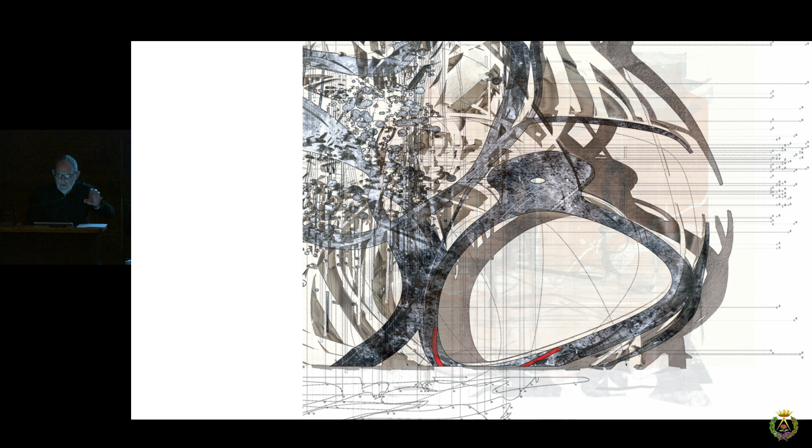These are kind of highly detailed, so as you move into them, they're scalar - you can take a microscope and move in, and find more and more information. It's again interested in looking at new methods of organization, and I'm trying to systematize in a way the unsystematizable, let's say.

So here I am now, looking at the drawings, and they're having absolutely a literal influence on a plan I'm going to show you. This is - I'm not sure what it is, it's not really a drawing, it's an image of something, like a drawing that comes out of a computer.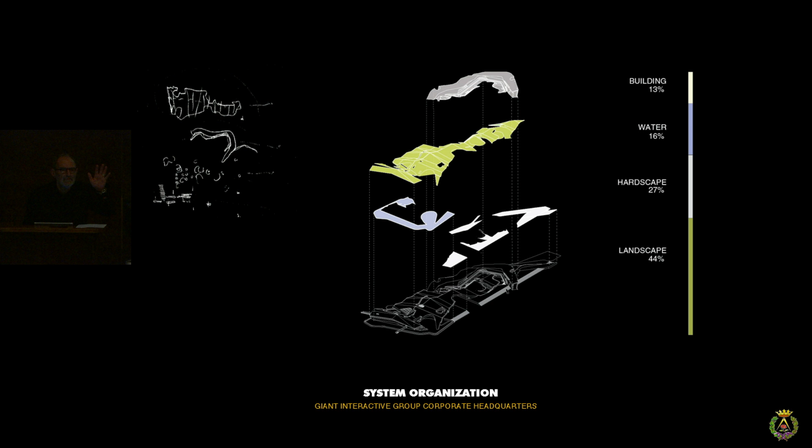I can now systematize that in terms of its relationship to a beginning organization of a building, and order it very responsibly in terms of its response to an urban environment and to nature. So I can look at the scale here, and tell you that 44% of it is landscape, and we can discuss it in those terms.

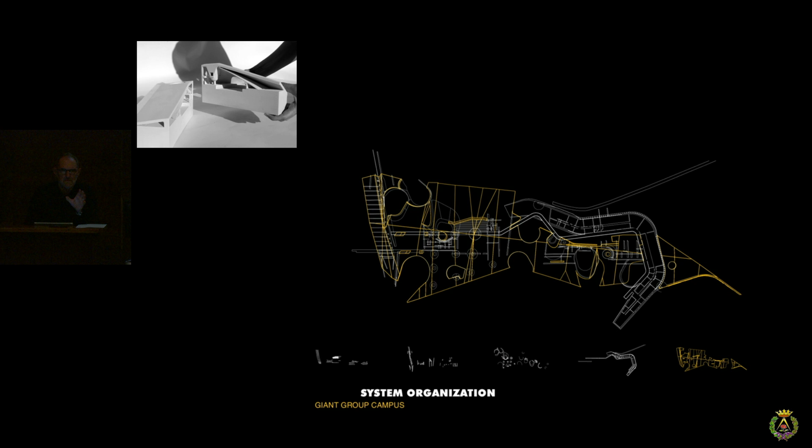And I can now take that system of that drawing and show how it produces a highly differentiated, fairly large-scale campus - a research campus in Shanghai that's half a kilometer long, so it's just about city making. Then those turn into plans, and I can take you there. This is all coming from that abstract drawing.

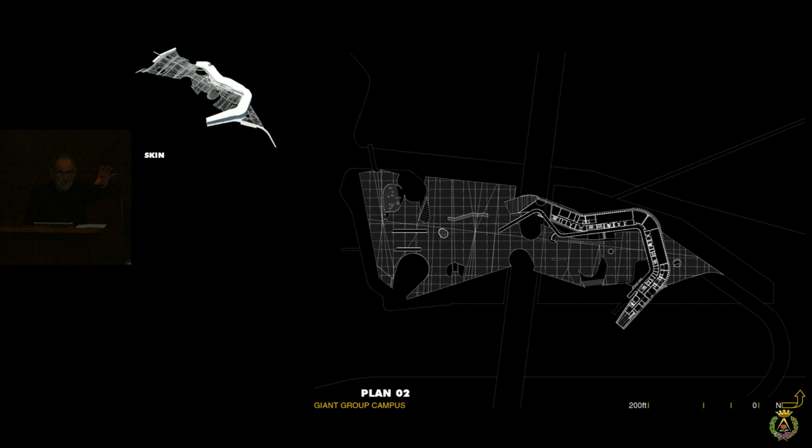It's going to be very much sectional because I'm digging, and it's going to be a hybrid between landscape and building. I'm going to be interested in something highly differentiated - every meter will be a different section, and yet it'll be ordered. I'm looking for coherency, but in a much more complex term that's going to follow more of a biological model than a mechanical model.

And then again, I'm looking at that constantly as a thing, right? I'm observing that three-dimensionally, and very early on, just to pursue the project in reality, I have to understand how to make it.

So the structural diagrams are coming out of my studio with the use of, in this case, Arup. But we're taking responsibility for it, and it goes way back to me being in the shop. We're still in the shop, but it's in the studio.

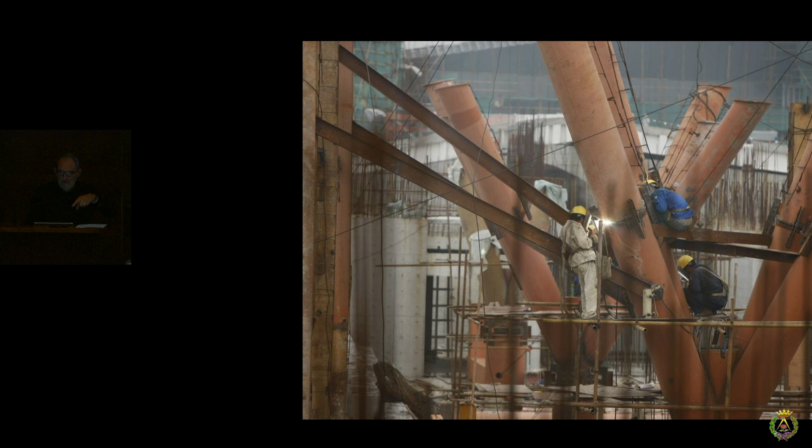And out of it comes this, and now it's very large scale, quite complicated. And today we're making something that has 20-something thousand individual pieces of steel, most of them all different, irregular. They're cut by a computer, and they come out of my studio before they had to do a shop drawing.

I don't know, you might find it boring or interesting, but it becomes today - we're, I think, moving more to the Middle Ages in terms of construction. We're building and designing. Because clients constantly say architects draw plans, and I say no, we don't, we build buildings, right? That's old school. Today we build.

And out of that, a huge amount of the creative stuff comes out of that. And again, within this language, we're now technically resolving the construction of these things that started as drawings, and it's going to get us this.

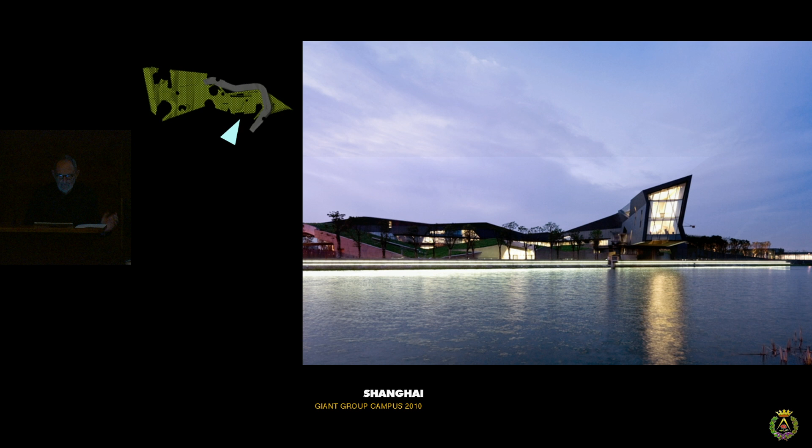Everything is building. Everything under the green - theaters, meeting spaces, libraries, making public space - a complete ambiguity between inside and outside, which of course is part of the tradition I bring from Los Angeles with Neutra and Schindler, and something that's absolutely kind of standard.

And an enormous differentiation that you constantly find new representations of a single system. Well, the system that represents the connection of multiple systems.

Crossing a boulevard to the other side of the boulevard for the campus - the connective tissue that makes that happen, the movement part of that. Part of an entrance sequence to a guest quarters. Part of the eating facility and cafeteria. The headquarters, the main meeting space. Again, everything connected to site.

So you're always aware of the relationship of the landscape and water. And yeah, you like the rowing? You know I Photoshopped that in, don't you? They don't row in China. You got it, nobody gets that one. I'm always kind of curious, going, what's that crew boat doing in the water?

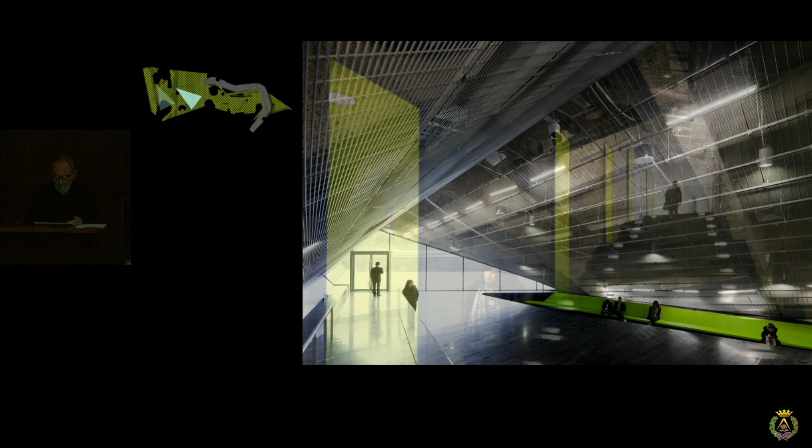And again, I'm showing this quickly, just talking about differentiation, that this is all kind of part of a singular system. And here the Earth is literally - we're documenting the Earth as it lifts off the ground, as it detaches, right? Because we're manipulating ground.

And then finally, last comment - if I knew I was doing this jury today, I would have started here, but too late.

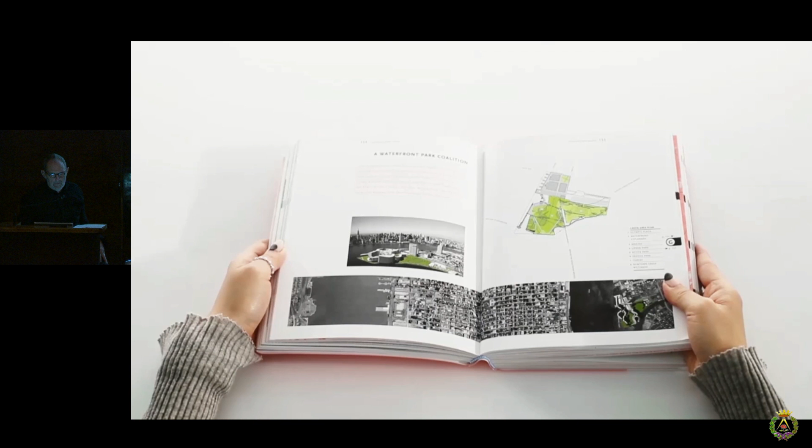I've become more and more interested in urbanism over the last decade. And it started with a publication of a book we did 4 or 5 years ago, expanded that, and the Combinatory Urbanism, that's going to talk about these ideas. And then one project took place.

We won a competition for the Olympic Village in New York. And it came up today, and it would be the thing I could most clearly talk to you about, but in a very personal way. I would have given myself the same critique I gave you today 10 years ago. I would have been more in your place than I am now.

When we did this project, we were now getting involved in my academic work at the Now Institute at UCLA in urbanism, and it became really clear to me that we were shifting more and more towards strategy, and that design was a limitation. We were also getting critiques about what was perceived as being over-designed in our urban work, and it was something we were constantly responding to, because I was trying to find a middle ground between architecture and planning, and the more interpretive, qualitative aspects of architecture versus the more demographic research, quantitative notions of planning. But the notion of the formal, or the resolution of it, became a huge discussion that seemed we were getting from critiques.

As we started this project - it's a housing project, and it was typical, I forgot the people in it, but it was Zaha and a typical group of people in the competition. It's a housing project - everybody went to work on a housing project, did studies of housing and produced housing.

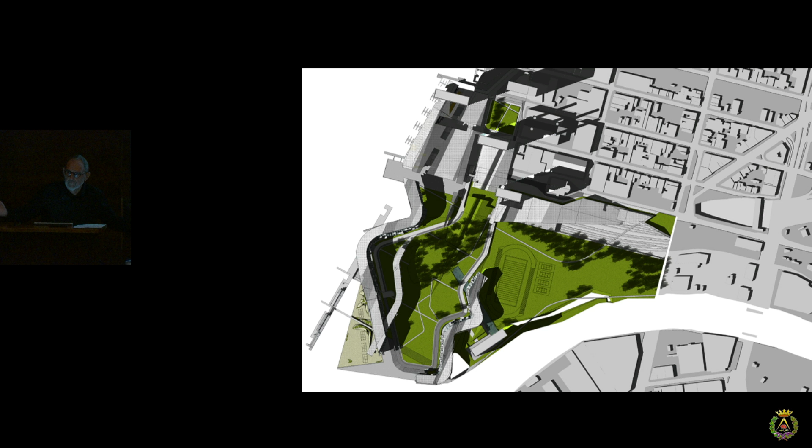And I think what it does — and this relates to the conversation I had today — is you realize the limitations of being an architect in solving the problem. It's not just a negative, because you come in with too many a priori notions about the importance of architecture. I think what you have to do is broaden your thinking, to look at projects that start with broad infrastructural, social, cultural issues, etc., to locate architecture's problem.

At that level, it changed our studios, and now we start the first semester with problem formation. We don't touch anything having to do with solution — what is the problem? For me, it's more and more important for young architects to take responsibility for the actual formation of the problem, and not turn that over to somebody else, and to be responsible for that.

And then immediately after that came a competition in China, for an island. And now we're looking at this thing and only talking about it in terms of environment, social behavior, infrastructure. In each one, like the New York project, we did a street pattern, and we said, well, it's 30% more efficient than a normative one, and we took responsibility — it's worth $500 million, and that $500 million will build a park. Each one we talked about in economic terms, in very specific terms, to be able to discuss with the city why we should win.

And then just recently we won — not moving, it's supposed to move, I think this is on the piece — we won a competition in China for quite a large project, actually kind of the scale of what you guys are doing, not quite as big, maybe 15 million meters.

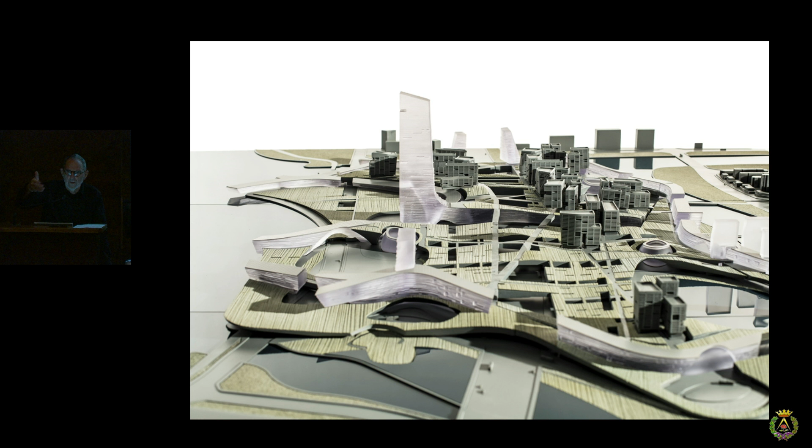It's going to represent the result of everything I've talked about, having to do with using site, earth, and landscape as part of the project — essential to that — and being able to study something that has the diversity, the complexity, the differentiation of a found city developed over centuries. Thank you so much.

Incredible. What? Incredible, amazing. Is that good? Absolutely. Good.